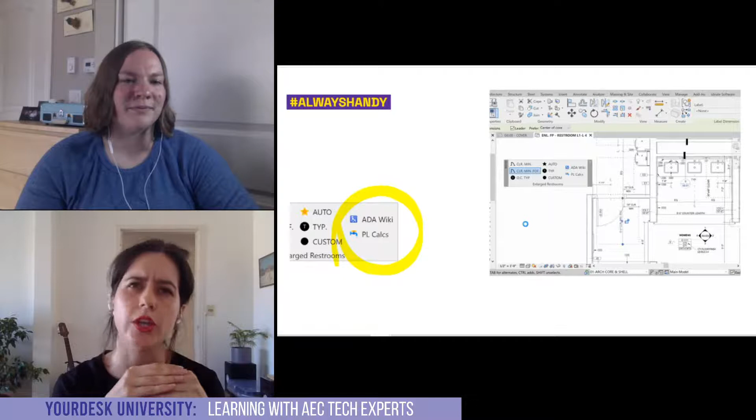I am very drawn by processes, and it always called my attention. Revit has wide power with many disciplines, different users, different stages of the project. But if you just grab a little chunk of a project, the tools you use are just 5 or 10. At a certain stage, say a week or two when you're at DDs and CDs, I didn't need to track every single tool needed for every different part of the process. I mean, I could have, but then it was pointless.

So what I did, and I'm kind of fine tuning right now, is just different tabs for different pieces. So instead of having architecture and stuff, we have internal tools for different chunks of the process, which are more handy to have. Not everything has a button in Revit, and not everything you can achieve by shortcut.

So this one's good. And again, it's about connecting words together. If you take a closer look at what's circled in yellow, there's an ADA wiki and a plumbing calculation wiki, and that takes you to our Notion wiki, where you get the basics at your fingertips, like what you need to check on doors and stuff.

So it's not super deep into Revit. It's just about connecting all the information and making it accessible and making it unique. There's no versions, there's no files scattered all over. Just a connection between every single part of the process, making sure the source is common for everybody, and the path is common for everybody.

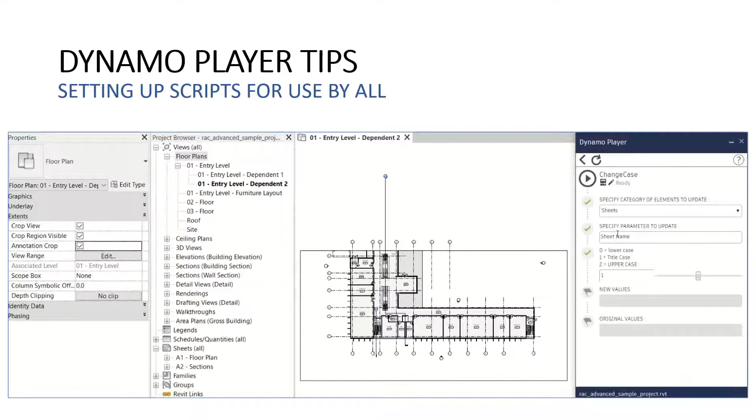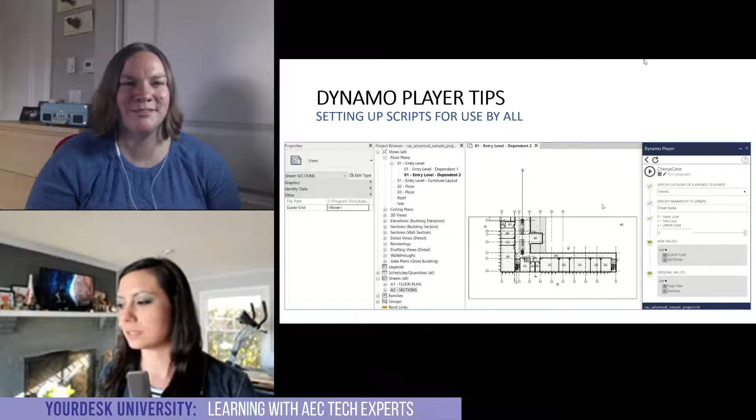That being said, I'm going to show a quick GIF here of the two scripts I'm going to go over. The first one is basically applying an annotation crop toggle to views, so you can see it has a true or false toggle that allows you to set that crop for your views or not. The next one is for changing case, and you can see this will work for any category of elements, any parameter, and any case. It also displays in a watch node what the change of case has been. So the Dynamo Player interface is really customized so that the user hopefully never has to get into Dynamo and hopefully isn't scared to get into Dynamo.

So let's talk about a few ways that I created these kinds of workflows. Tip one: use Booleans, our true/false values, when we want to be able to apply a crop toggle.

As we know, the annotation crop toggle parameter is a Boolean. So this works perfectly, right?

However, sometimes we want to provide a list. Do you want to work with rooms? Do you want to work with areas? We can actually use a true or false Boolean with an if conditional statement, so that when the user toggles true or false, the if statement does all the work for you. You're not having to provide two separate scripts, one for areas, one for rooms. This customizes it down to just one.

Tip 2, provide multiple options. Maybe you don't want just rooms or areas. Maybe you need lowercase, title case, and uppercase. A Boolean wouldn't work there. So what I'm doing here is creating a list, and based off an integer toggle, the get item at index node does the work for me, grabbing the list item based on the case the user specifies. So I don't have to have a separate script for lowercase, a script for title case, and so on. Tip 3.

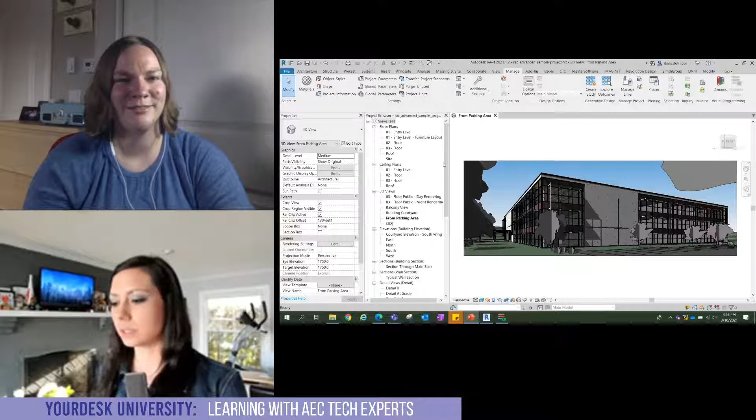Alrighty, so we should be seeing the good old sample file, right? We're all very familiar with this guy. So essentially, the script that I just demonstrated with that watch node is actually going to place some families based off of an Excel file.

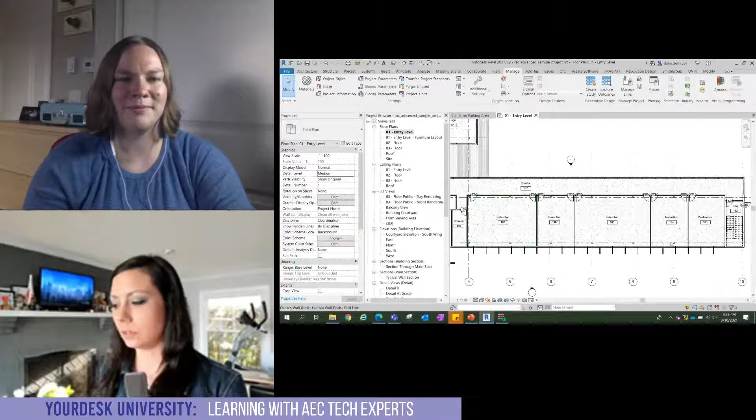Okay, so I have some rooms down here. Maybe your client gave you an Excel file, and they want you to place the families in the specified room based off the existing conditions. You have an Excel file with some family content, and you want it created through Dynamo. So I have this family placer.

I'm going to click on edit inputs, which is always what I tell my users is the first thing you should do within a Dynamo script. Let's see what inputs you have. You'll see here I'm going to specify first the sheet name, that way if you have multiple sheets with different content you can navigate between them. The file, pretty straightforward. Just go ahead and run that.

Of course, in the background it's going to open up my Excel file, and it's going to tell me I don't have a room number 1108. So I need to verify some things. If I pull over my Excel file, you'll see I have some desks that got placed, but you can see nothing happened. The Dynamo script actually failed.

The reason is because if you're placing 600 families, it's sometimes really hard to track which families didn't get created. In this case, it takes a really long time to run that script too - about 5 minutes or so to place 600 families. So in this case, it just fails completely.

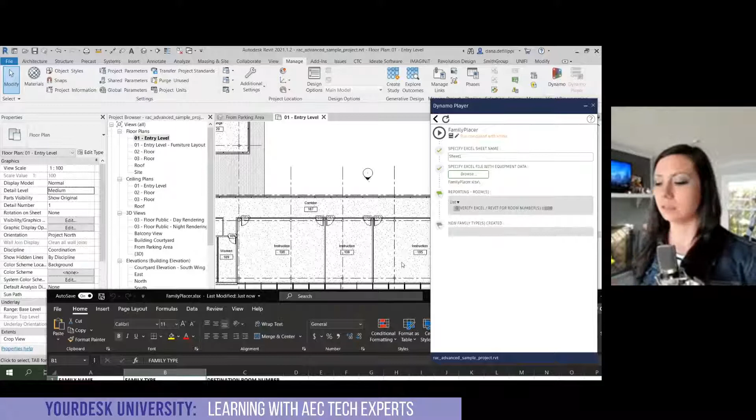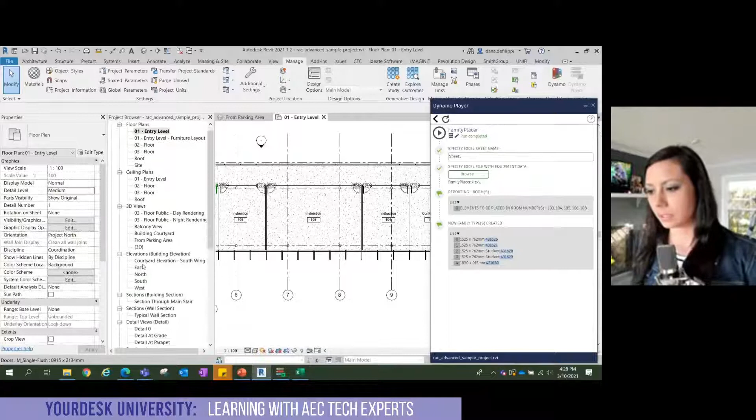I can come into my Excel spreadsheet and say, oh, typo - delete that one out, save it, close it out because Dynamo needs to read it, and rerun that. And we'll see if I go to my furniture plan, wherever that is... there you go. It has placed my desks and told me not only the room numbers the families got placed in, but the families that got placed in addition.

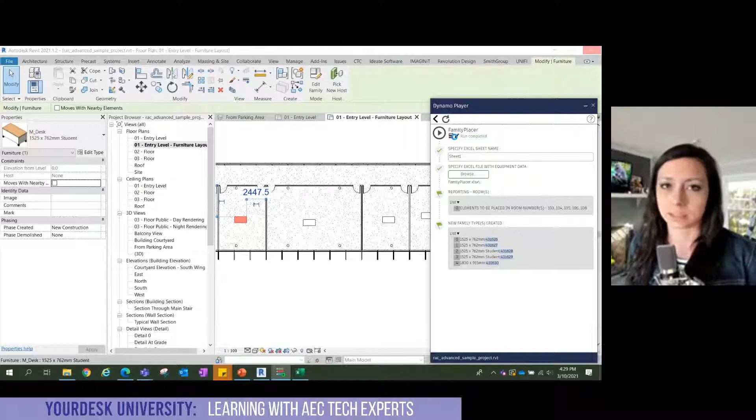If I look at this script, it's actually kind of a lengthy thing, and I will share it because I'm a nice person. But it essentially just goes through a whole bunch of statements - what's happening, why is it null, what didn't you find in Excel, what didn't you find in Revit, concatenate those values together, push those out to a watch node. So what's actually happening in terms of the beef of the script isn't very complicated - it's really the processing of getting this reporting to come up, why it didn't work, or what rooms actually did get furniture or whatever types of elements.

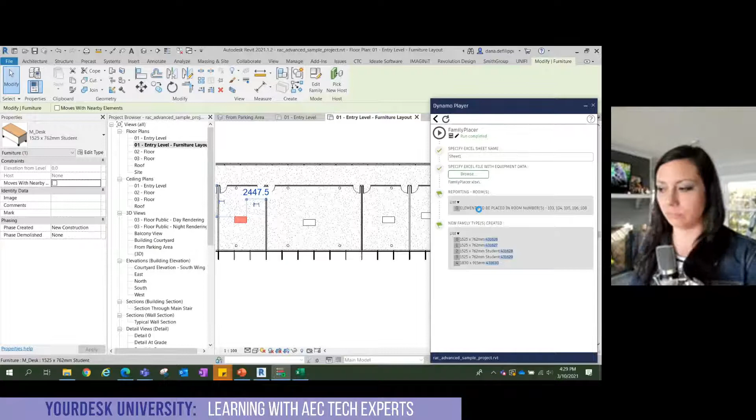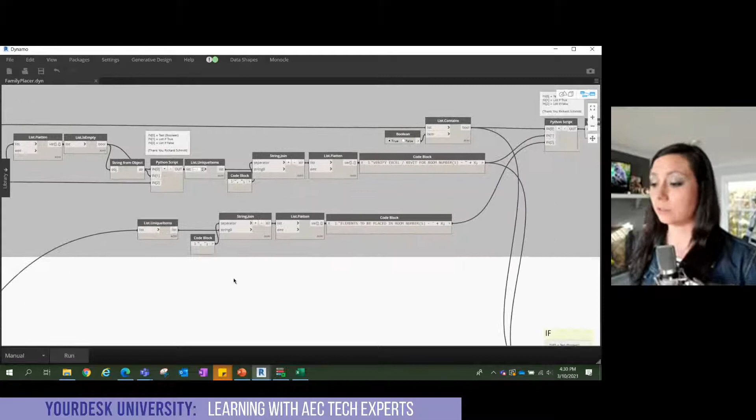And we're waiting on Dynamo per usual - this is where I like to have my elevator music. So you can see here, everything in gray is actually the reporting specifically for that room data information. You can see the beef of the script isn't really that much, but it's just running some basic is-it-null checks, filtering if it's null, running some Python scripts for better list formatting because Dynamo doesn't do that very well sometimes, and then telling me what it is with that room number, then shooting that out to the watch node.

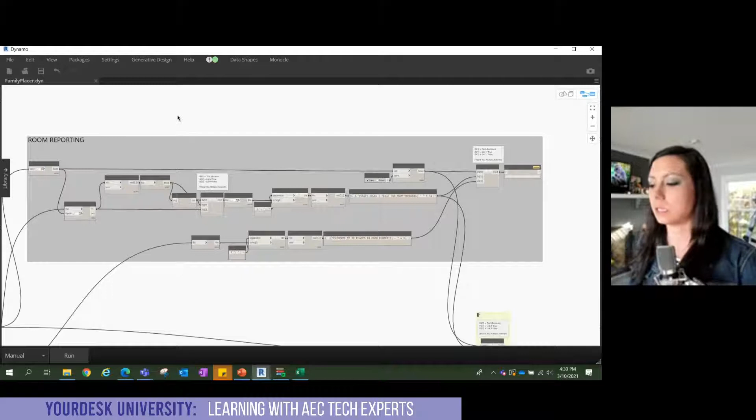So it's a little bit complicated in terms of the actual reporting, in terms of the combination of nodes, but I'm sure most of you guys could do this completely. I'll share it so you guys can take a look and see, in addition to the Excel file. But that's really all I have.

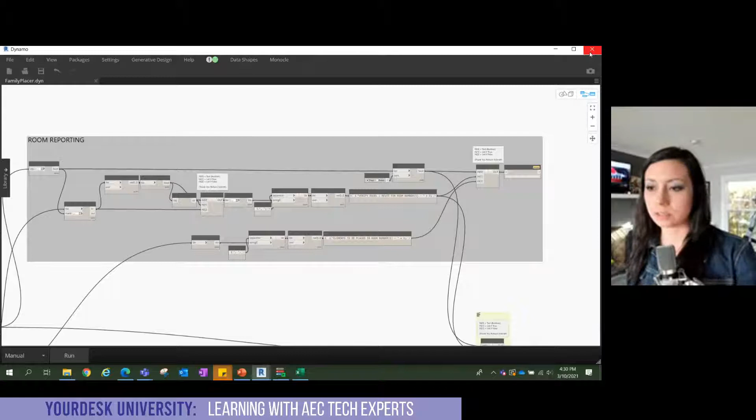I don't know how I am on time. Maybe I could take questions if we have any, or jump on to the next presentation.

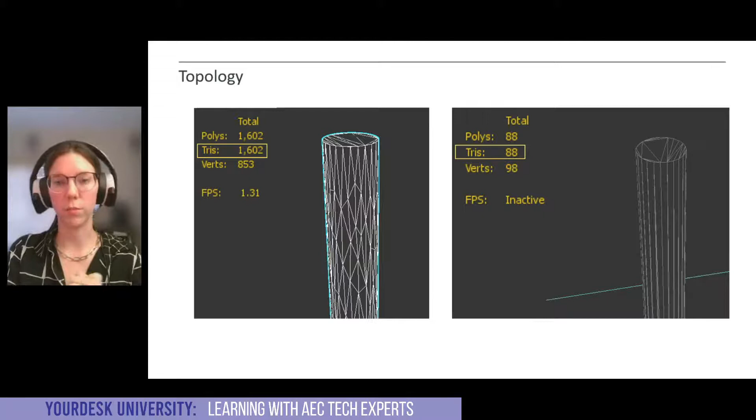We also need to keep a close eye on our cylindrical shapes and curved surfaces. This is problematic with some off-the-shelf products I've seen—they're not handling the topology and meshing of curved surfaces and cylinders the way you'd think they would. Just by taking triangles from the top to the bottom of a cylinder, you can reduce the poly count significantly, as you can see in this example. We're able to do this through a number of different methods we can get into another time.

Another element of this is batches or draw calls. A batch or draw call is how many things the processor is rendering at a time. If you're able to reduce the total number of batches, you're going to increase the frame rate. It's one of the things we focus on the most.

Moving forward, let's talk about how we can improve the number of batches and draw calls other than just combining meshes—we can turn all our meshes to static. Luckily, this isn't really the case if you're working on a game, but in the AEC industry, our buildings aren't going to be moving. There may be edge cases where a building moves, but I'm not aware of it at the moment. So it's important to set it to static, so the computer knows it won't be expecting it to update or be dynamic at any point.

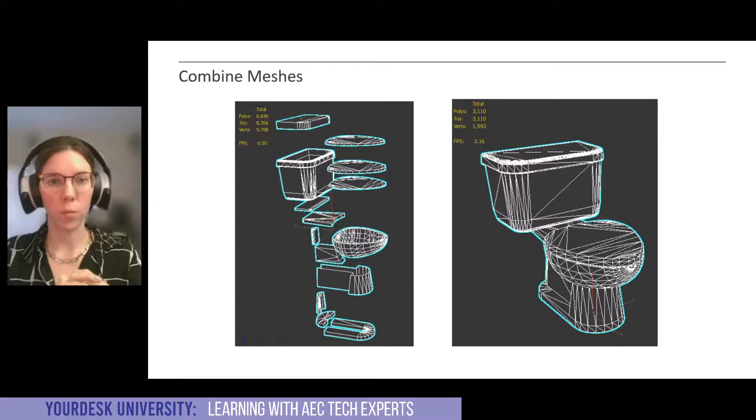Combining meshes is what we just referred to, but let's get into it a little bit more. We are able to reduce this object from 8,000 triangles to 3,000 triangles, so even the act of combining reduces the poly count. It's just generally beneficial.

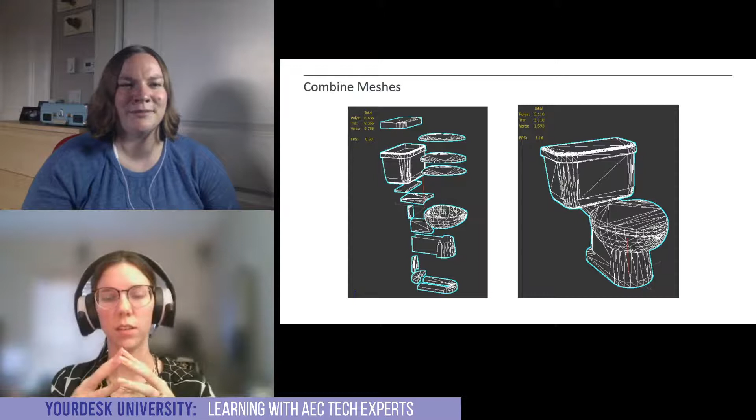When we are combining the meshes, we are turning them from multiple draw calls into one singular draw call. And when you're working in a project with hundreds, thousands, and into the six figures of elements, it's very important to take care of these little pieces, even if it's just a toilet.

When you get into Visual Studio, we use C# in our projects. It's important to be removing empty update loops. Even though it's a really small thing, we have to get into the nitty-gritty and make sure we are running as optimally as possible.

So even just having an empty update loop in one of our scripts—if we have this empty update loop in multiples of our scripts, then that's going to be an extra tick running on every tick that we do not need. If we remove that entirely, it will improve the frame rate overall.

On that note, I don't think I have this as a slide, but it's also beneficial to move things from Update to Awake, so it's only running once if it's applicable for the method you're working with. In most cases for our tools, moving them into Awake is beneficial.

So, additional considerations for optimization. I didn't have any visuals for these things, so just let me talk at you for a second. If you're able to replace any of your GetComponent calls with direct references, that's going to improve your frame rate. Instead of having to go and fetch the component you need for that method, you're creating a direct reference—I don't know how else to say that.